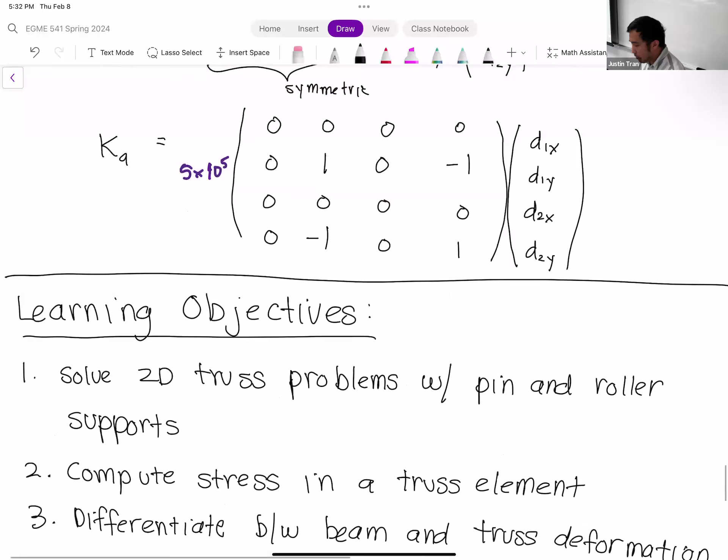Okay, all right, so let's go ahead and pick up where we left off on the example. I'm just going to scroll up here, this should be in your notes from Tuesday, so you don't have to rewrite any of this down. I'm just scrolling up to refresh your memory. So on Tuesday we were doing this example. It's a 3-element example. We have 2 truss bars and 1 spring, arranged in a 2D configuration, and what we're interested in is the deformations of node 1. Node 1 is the only node that's not fixed in this situation.

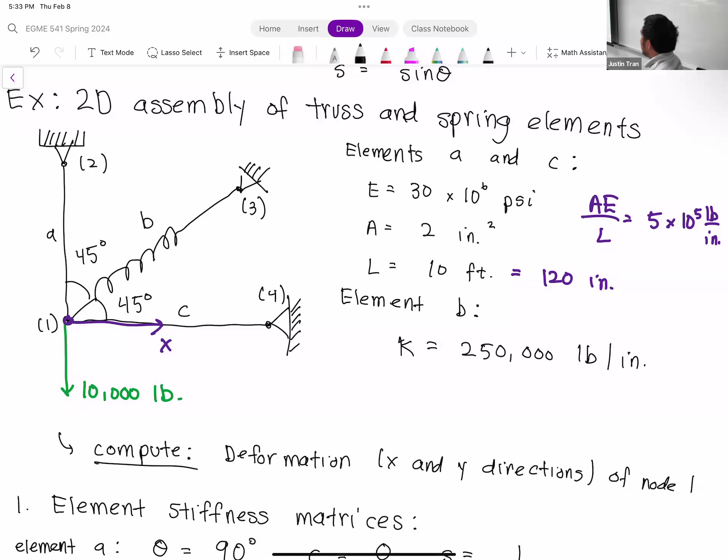So for the two truss bars, we are given its material properties as a Young's modulus of 30 times 10 to the 6 psi. Its cross-sectional area is 2 inch squared, and they have a length of 120 inches. And element B is a spring with a spring constant of 250,000 pounds per inch.

And so to solve this problem, we are going to go through our direct stiffness method, the same one that we've been doing for our 1D problems. The biggest difference here is that our element stiffness matrices are going to be a lot more complex, just because we're in 2D. So on Tuesday we went over this 2D element stiffness matrix, and we have a bunch of sines and cosines.

And we're going to write this out for all 3 of the elements. We did it here for element A, which is angled 90 degrees with respect to the horizontal. And we end up with this element stiffness matrix here. So we have 5 times 10 to the fifth out on the outside, and we have a bunch of zeros and ones because cosine of 90 degrees is 0. Okay, so let's go ahead and pick up right where we left off here.

So let's go ahead and compute the element stiffness matrix for element B.

Okay, so let me just draw the spring here, just so you can kind of see. So this is node 1, this is node 3.

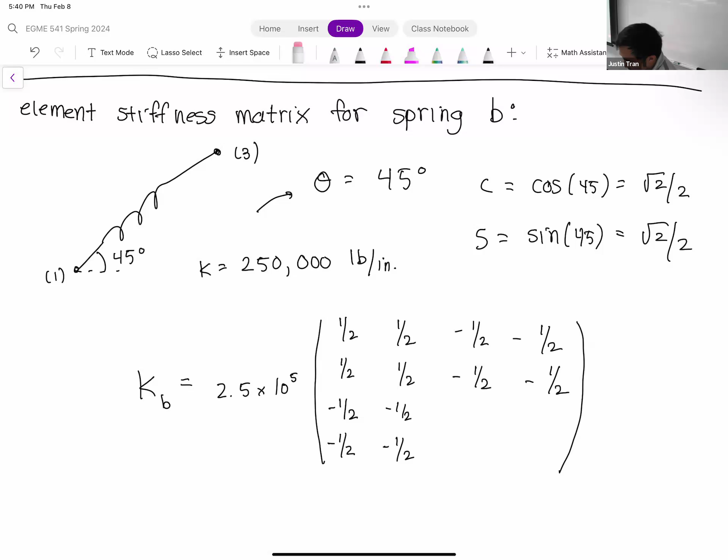As you get further down, it gets easier. This is going to be a cosine squared and a cosine times sine. Both cosine squared and cosine sine are going to be 1/2 in this case, because they're both just √2/2 times √2/2. We're going to have a positive 1/2, positive 1/2.

We're going to do our trick, and write that last entry into the third column. So it's going to be 1/2 down there.

And then our last entry here in the bottom right is going to be sine squared. We know sine squared is going to be √2/2 times √2/2, which is also just 1/2.

And then the last thing we're going to do before we move on to element C is we're going to write the degrees of freedom that this element stiffness matrix is responsible for. So we know from this figure here that element B is connected to nodes 1 and 3, so that means we're going to have D1x, D1y, D3x, and D3y.

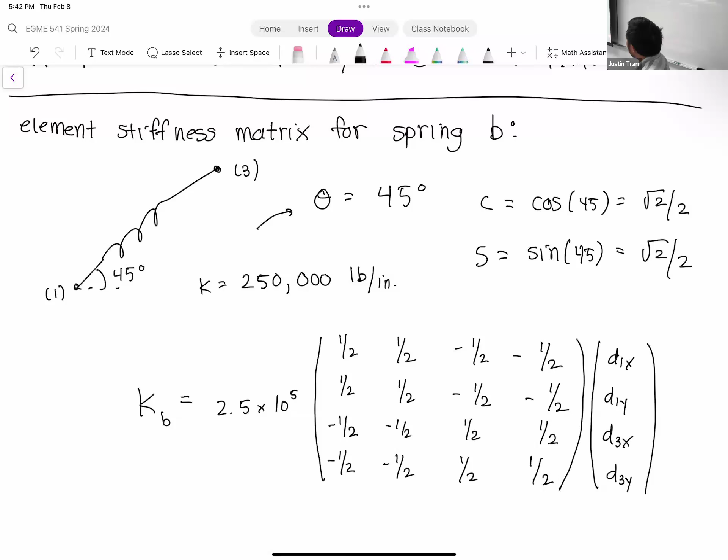Any questions on how we got that? Okay, all right, so let's keep going. So we have one more element here - we have element C.

So element C looks like this, connecting nodes 1 and 4. You can see here we have a perfectly horizontal element, and so since there's no angle here, our theta is just going to be 0 degrees.

All right, so if we compute our trig terms here, cosine of 0 is going to be 1, and sine of 0 is going to be 0.

All right, so let's go ahead and plug all these in. This one's a little bit easier just because we have some zeros. We know that any term that involves sine in our element stiffness matrix is just going to go to 0. We already computed the quantity AE over L from the previous class back on Tuesday - that was 5 times 10 to the 5th, so I'm just going to include that there.

So if we put these in, I'm just going to do this quickly since this one's much simpler. Our first row is going to be 1, 0, minus 1, 0. We write that into the first column, and we have something that looks like this - a matrix just like that.

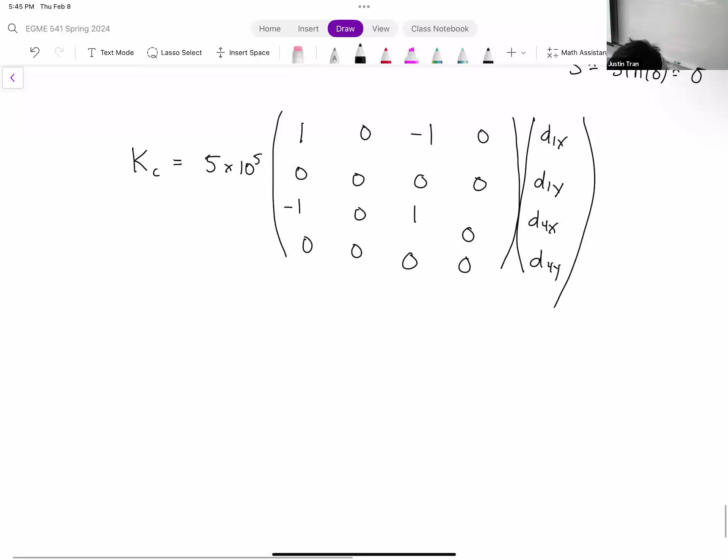All right, so for these problems, you may be interested in using a spreadsheet program or some kind of program online just to help keep track of the matrices, because this can get gnarly.

So in this particular problem, we have 4 nodes, labeled 1 through 4. But since we're in 2D, each node is going to have 2 degrees of freedom, because it's possible for each node to deform in the x direction and the y direction.

So what does this mean for our global system? If there's 4 nodes in the system and each node has 2 degrees of freedom, that means our global system is going to be an 8 by 8 matrix.

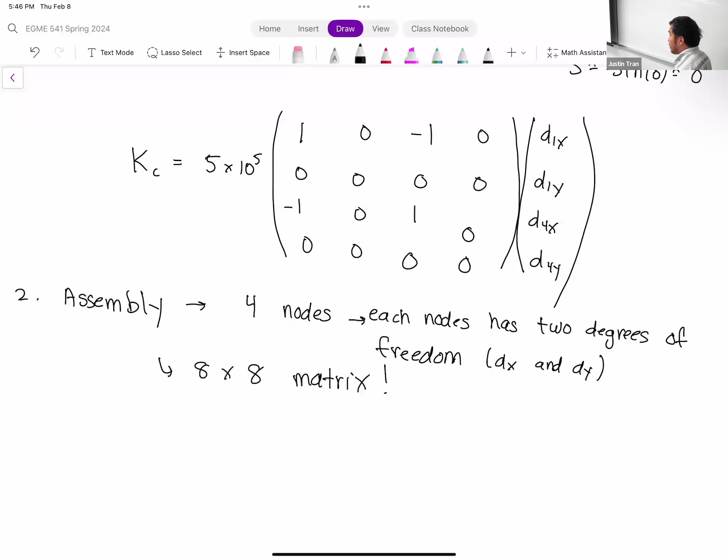This is going to be by far the biggest matrix we're going to write in this class, so it gets messy. I'm lucky because over the course of my lifetime, this is probably the 11th time I've done this problem in front of people, so I know what the solution is. But if you're doing this for the first time, it's very easy to get lost.

All right, let's start with the forcing vector. The way this works is you go node by node, starting from node 1 to node 4, and list its x and y components. We have f1x, f1y, f2x, f2y, f3x, f3y, f4x, f4y. That's 8 rows.

Our matrix similarly is going to have 8 rows and 8 columns. Oh, I forgot one thing — we're going to do that thing where we make things simpler: let's have a factor of 10 to the 5th out in front, just to save ourselves a little writing. So it's implied that everything inside the matrix is multiplied by 10 to the 5th.

Let me go ahead and write the columns in here. I think for this problem it's especially useful just because there's so much going on. So we have D1X, D1Y, D2X, D2Y, D3X, D3Y, D4X, D4Y. Now we're going to write the rows in: D1X, D1Y, D2X, D2Y.

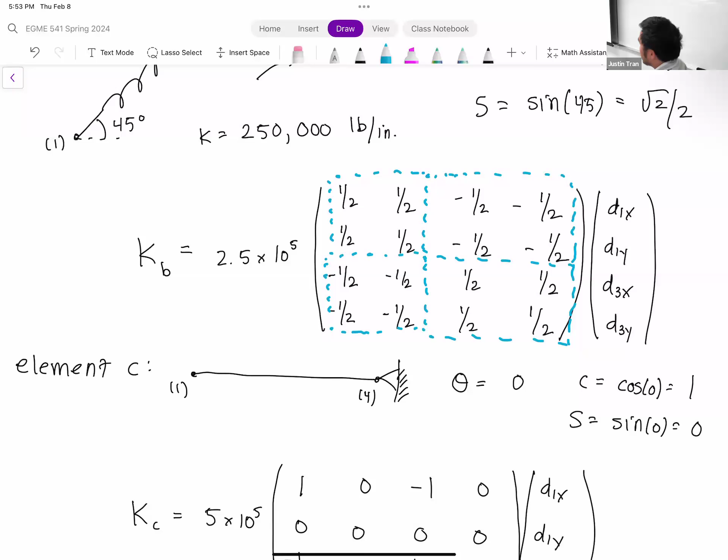So I've basically taken those four quadrants and split it up into the different parts based on the node number. Let's go ahead and insert these. Remember, for any overlapping components, we're just going to add them together, so we're going to add a plus.

The numbers for this are a little unfortunate because in front here we have a 2.5 times 10 to the fifth, and we take half of that, we get 1.25. So we have plus 1.25, plus 1.25, plus 1.25, and this 5 plus 1.25. For all of those overlaps, we're going to add a positive 1.25 to them.

Now we're going to go to the upper right, and that blue portion is going to be all negative: minus 1.25, minus 1.25, minus 1.25, and minus 1.25. Then we come to the bottom left, which is also minus 1.25, minus 1.25, minus 1.25, minus 1.25. And then the bottom right, which is positive 1.25, 1.25, 1.25, 1.25.

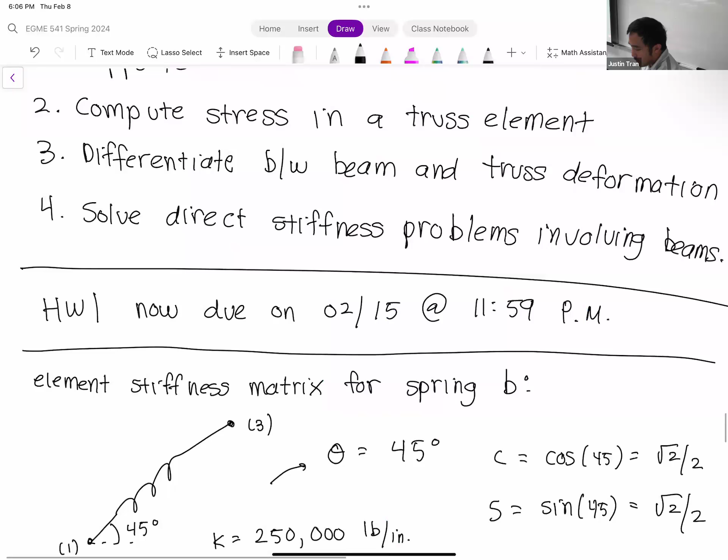So it's just going to go to the right and down? Yes, exactly. Which is interesting because our force is only in the y direction here, right? But we do see a little bit of drift over to the right, mostly because of the spring. When the spring pulls down, it has to lengthen in that direction, so it pushes it over to the right.

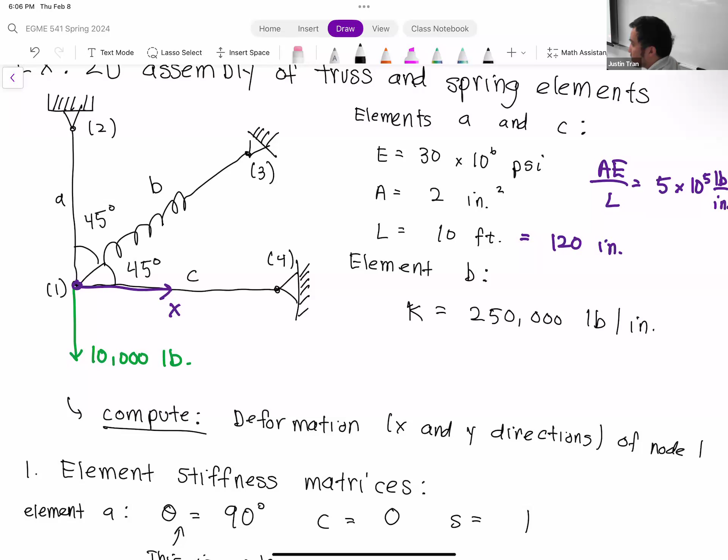Okay, so let's move on to the next thing, which is actually kind of an addendum to this example. One thing you can do for truss elements is compute the stress in the truss elements. When I talk about stress, I mean the internal structural stress within the element.

The reason I'm bringing this up is that when we do ANSYS in a couple weeks, one thing you're going to learn is that a lot of people use ANSYS to do stress analysis. FEA.

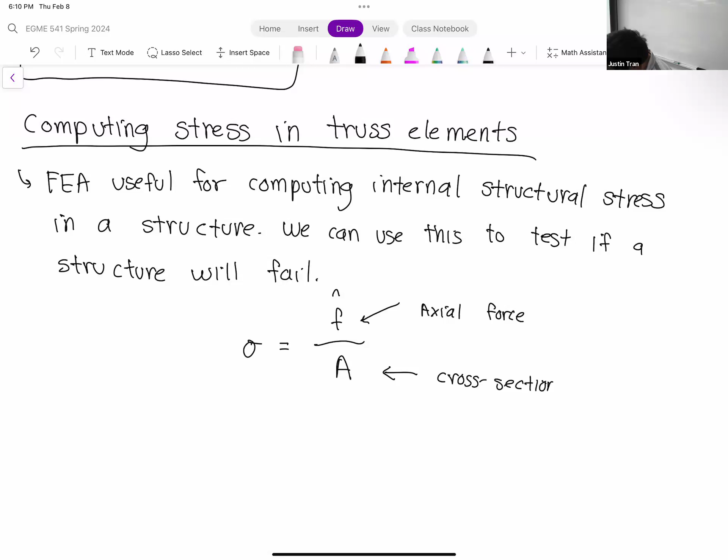The good news is that after you complete a direct stiffness problem, let's say you just did the previous problem there, you have access to all these pieces of information, although we do have to work on it a little bit.

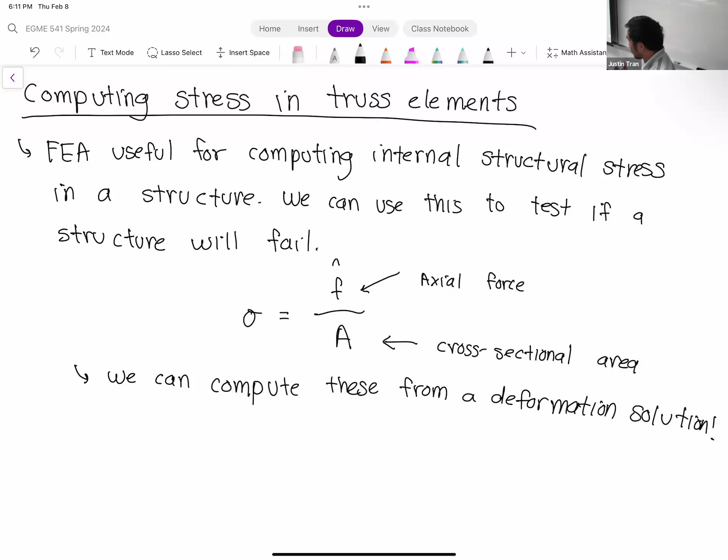It does involve some transformation matrices, and in the interest of time, I'm going to skip the derivation for it, but the solution looks something like this.

So if you want to compute the stress in a particular truss element, you take the Young's modulus divided by the length, and multiply that by a row vector. This row vector is going to be minus cosine, minus sine, cosine, and sine. So you can see here we have our sine and cosine terms. These are element specific.

And then you're going to multiply that by a column vector of that element's deformation.

This does require you to pick out different entries of the solution for that particular element. I'm going to show you how to do it for both of the truss elements in the previous examples, just so you can see how this is done.

So let's take our result from the previous example and let's compute the stress.

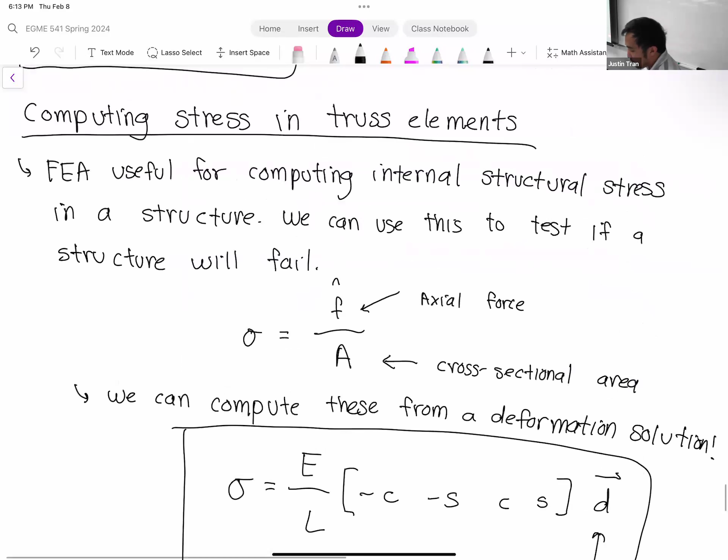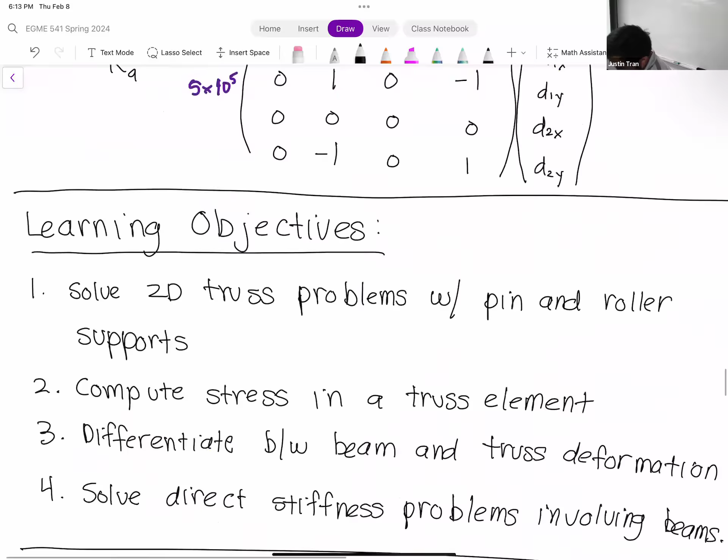Let's start with element A. Element A is the first truss bar that we have, it's the vertical one. If we come back up to this figure here, we see element A is connected to nodes 1 and 2. It's the one that goes up and down.

We also know the angle here. The angle is 90 degrees. That means cosine is going to be 0 and sine is going to be 1.

So the stress in element A is going to be the Young's modulus divided by the length, multiplied by this row vector. We have minus cosine, minus cosine is going to be 0. Then we have minus sine, minus 1, 0, 1.

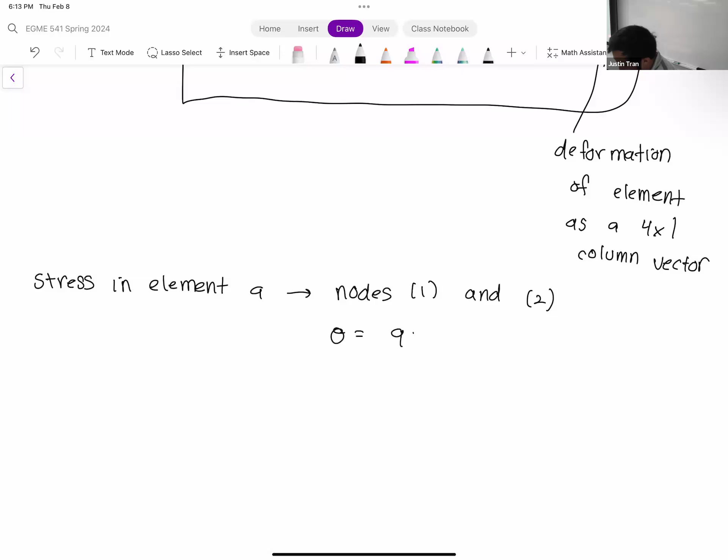Then we're going to multiply this by the deformation vector for that particular element. This is going to be a 4 by 1, so it's going to be d1x, d1y, d2x, d2y. Some of these can be 0, that's okay, and in fact in all likelihood some of these are going to be 0 because of the fixed constraints. So let's go ahead and plug in for these.

So we have 0.0033 inches for d1x, d1y is minus 0.0167 inches, and then d2x and d2y are both 0.

So then we do the vector multiplication. We have a row vector multiplied by a column vector, so that's just basically the dot product between those two vectors. We plug in for E, we plug in for L, and what we get is 4,175 PSI.

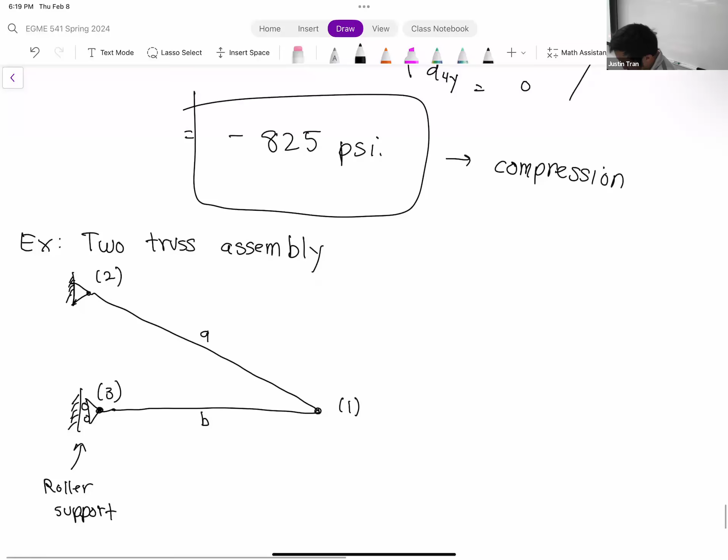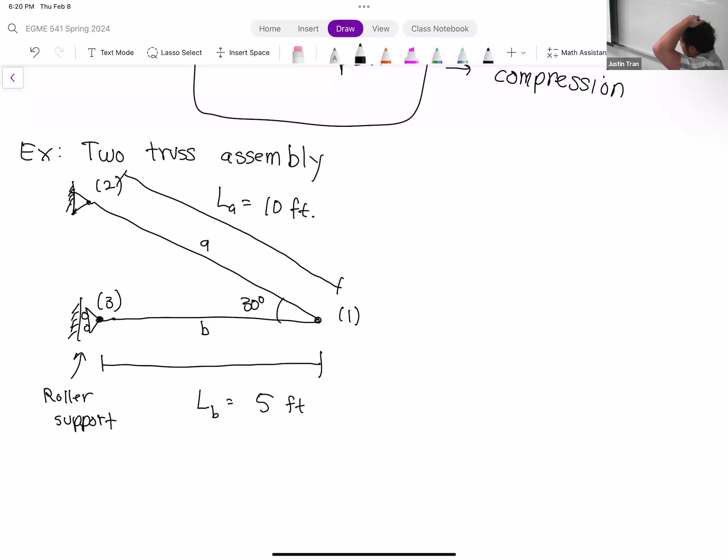The angle between the two elements we're going to assume is 30 degrees. The length of element B is 5 feet, and the length of element A we're going to assume is 10 feet. Besides that, we're going to assume both truss bars are made of the same material, so they have the same Young's modulus, and we'll assume they have the same cross-sectional area as well. So E is equal to 30 times 10 to the 6th psi.

Question: how would a hinge support differ from a fixed support in our calculation? Since these are truss elements, we've mostly been dealing with hinge or pin supports. Effectively they're the same as a fixed support, because truss bars don't impede rotation at all. But once we get to beams, there is a difference between pinned and fixed supports. If you mean the roller support, that will make a difference in terms of how we constrain the different degrees of freedom, but I'll leave that until we get to the boundary condition portion. If you want a quick answer, we're going to constrain one direction but leave the other one free.

Our cross-sectional area is going to be 1 inch squared. Just like we did in the previous example, let's use our direct stiffness method.

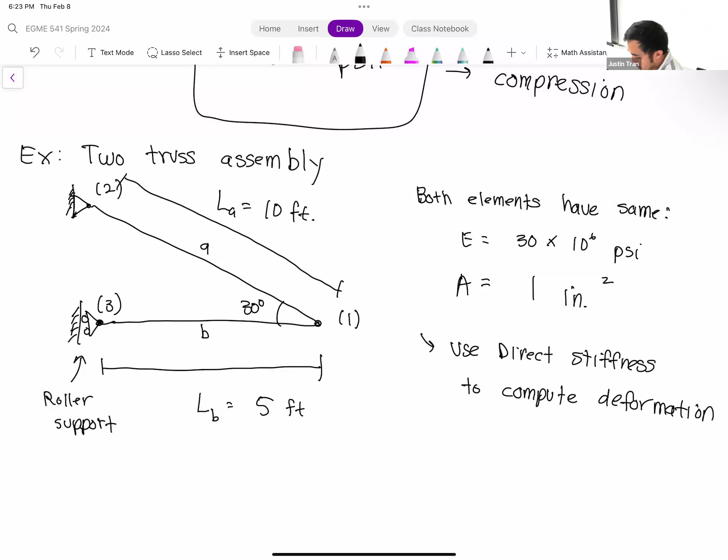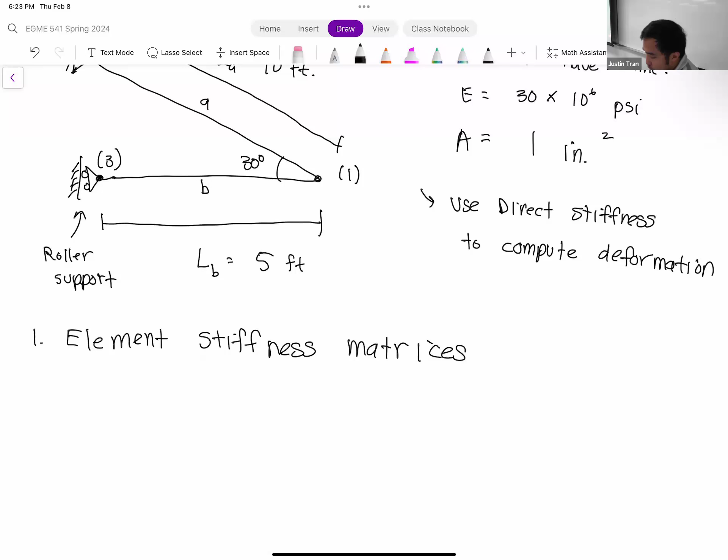Okay, so let's start with the same method as we did before. Let's start with our element stiffness matrix. We only have to do 2 here, which is nice. So let's start with element A.

Let me draw it here just for the sake of it—I know I have it right up there, but let's draw this one here. Okay, so from the figure we know that element A is connected to nodes 1 and 2 in the configuration shown. We're also given this angle right here, which is 30 degrees.

So we now need to compute the element stiffness matrix for this element. Okay, so the first question we're going to answer is what is the angle theta for this element? It's very tempting here to put 30 degrees, right, because that's the angle given to us in the figure.

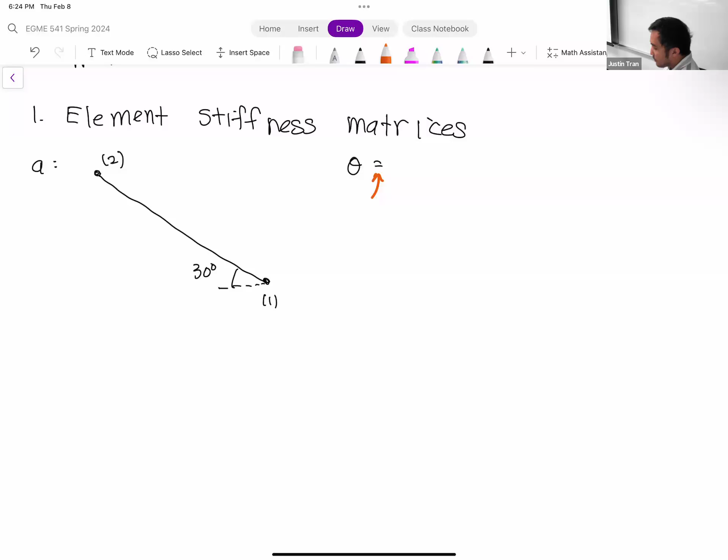But I'm going to tell you to hold your horses a little bit, because remember what this angle is defined as: the angle between our element and the positive x-axis. So where is the positive x-axis in this situation?

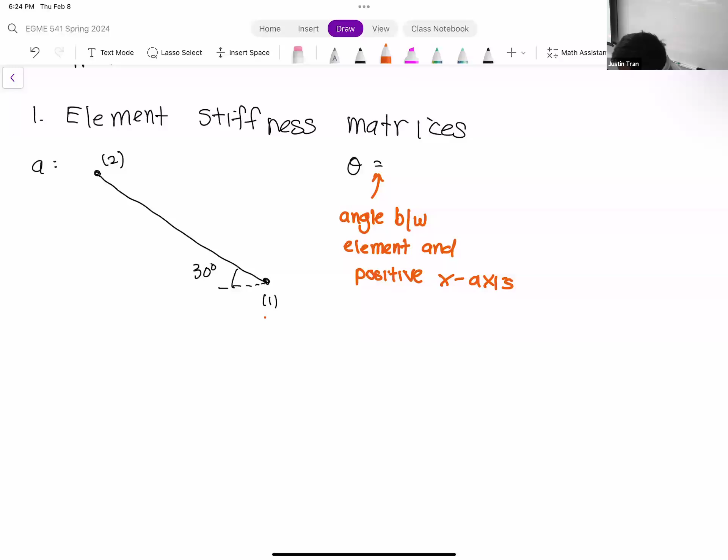Well, there is not one, but we have to draw one in. And so what you have to do in these situations is go to the lower numbered node, which in this case is node 1. So node 1 is the lower numbered node in this case, and then from there you're going to draw the positive x-axis.

All right, so now what we want is the angle between this element and that positive x-axis. The angle that we actually want is this kind of larger angle like this. We do a little bit of geometry here, and we can see that this angle here is actually 150 degrees, not 30 degrees.

So why do we use this convention? Why do we use the lower numbered node? Why do we use the positive x-axis? In honesty, there's not a great reason for it—it's just a convention. So in order to make sure that when you do these problems you're consistent and everything lines up correctly, we have to have a convention, and this is just the one that I use.

You can very easily choose a different convention—if you want to use the higher numbered node, or the y-axis, you can do all that. As long as you're consistent in your convention, you're going to end up with the same answer. But if you want to follow the same method, this is the one I use: positive x-axis on the lower numbered node, rotating counterclockwise from there.

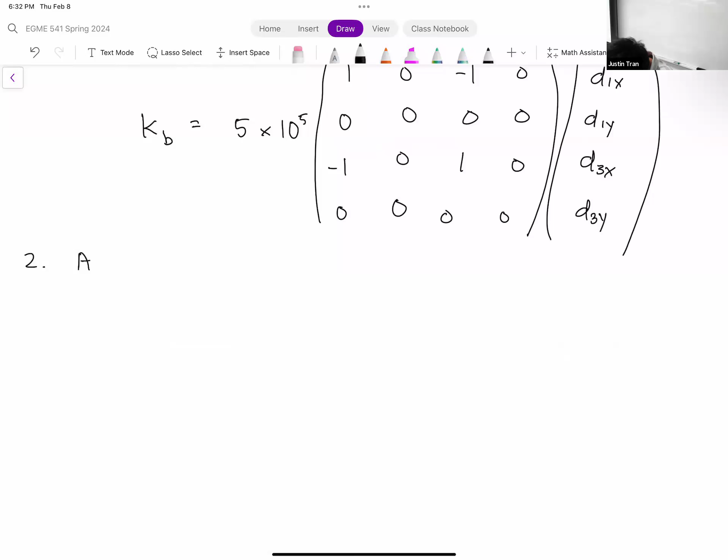All right, so the next step is going to be assembly. Let's go ahead and do that. We have a little bit of a more reasonable system here because we only have 3 nodes, and so that means our stiffness matrix is going to be a 6 by 6.

Question: I know it would be unconventional, but could we have chosen our positive x-axis to be in the opposite direction? It would yield different matrices, but as long as you're consistent with it, all of those things are going to cancel out in the end. So as long as you're consistent, you can choose whatever convention you want. You very easily could have chosen the positive x-axis to go the other way. As long as you're consistent and calculate the angles the same way, you're going to get the same result. The sign at the end might be different—you might get a negative x deformation, but that's because you defined the positive x direction to be going to the left. As long as you're consistent and apply it all throughout, you can do all that.

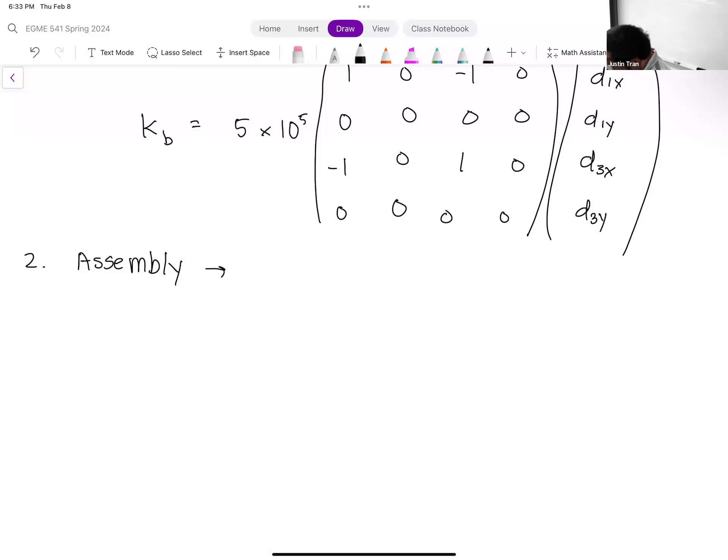All right, so assembly, 6 by 6 matrix. We have F1x, F1y. Thanks.

Okay, let's go ahead and insert our matrix here.

What's the best way to do this? The one that's really a pain to do is going to be element A, just because we have all these root threes and stuff going on. Whenever you have an irrational number, that's never fun to input into a matrix.

Okay, let's do this. First thing we know, since we have an extra factor of 10 to the fifth, I'm going to leave that outside there.

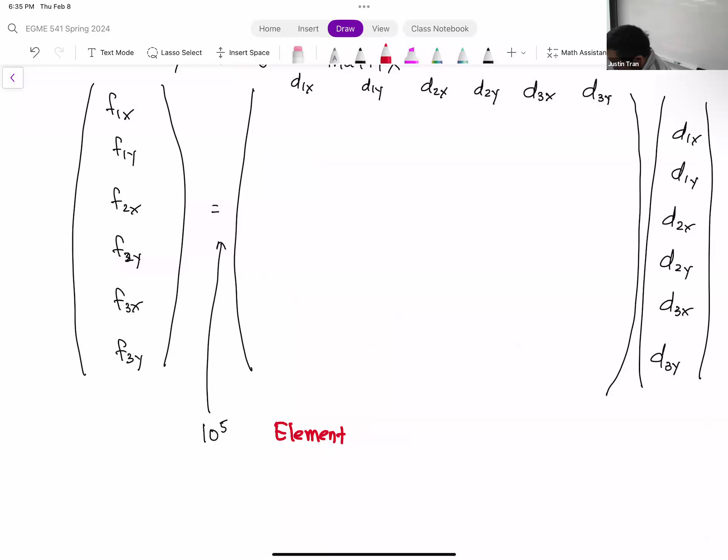Let's highlight the locations where they're going to be. I'm kind of rushing a little bit just because I do want to get to the end of this example before class ends today. Okay, so we know element A is connected to nodes 1 and 2, and it's going to take up this portion right here.

Element B is going to be nodes 1 and 3. So if we box that out, it's going to be here, here, here, and here.

All right, so I'm just going to fill this in. Of course, this requires you to do each one individually and then add them up, but let's do this just for the sake of time.

So in this top right here, we have a 6.875, multiplied by 10 to the fifth on the outside. Then we have a minus 1.08, minus 1.08. That is something I rounded because it involves root 3 over 4, which is an irrational number.

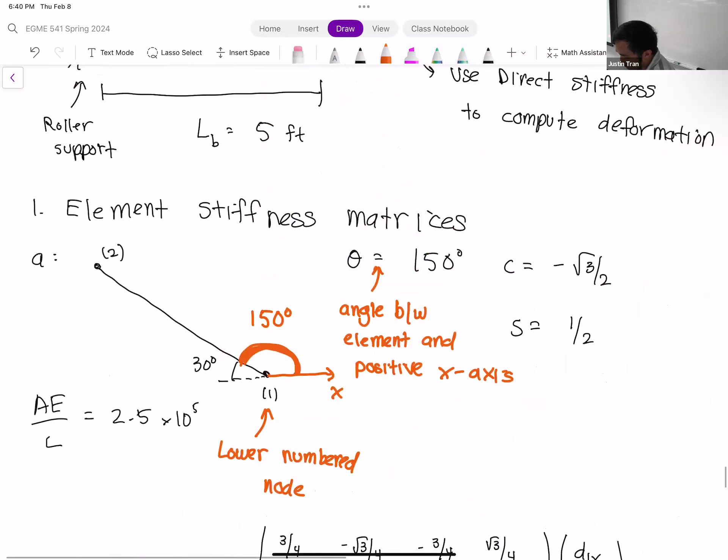So now let's go to node 3. Node 3 was the interesting one we were looking at the beginning of this example, right? Node 3 is constrained by a roller support. Let me scroll back up here so you can look at the figure one more time, and let me circle node 3. So node 3 is on a roller, right?

And what a roller does is it only constrains the direction that is perpendicular to the wall. In this case, our roller wall is vertical, so that means the only thing we're going to constrain here is the x direction.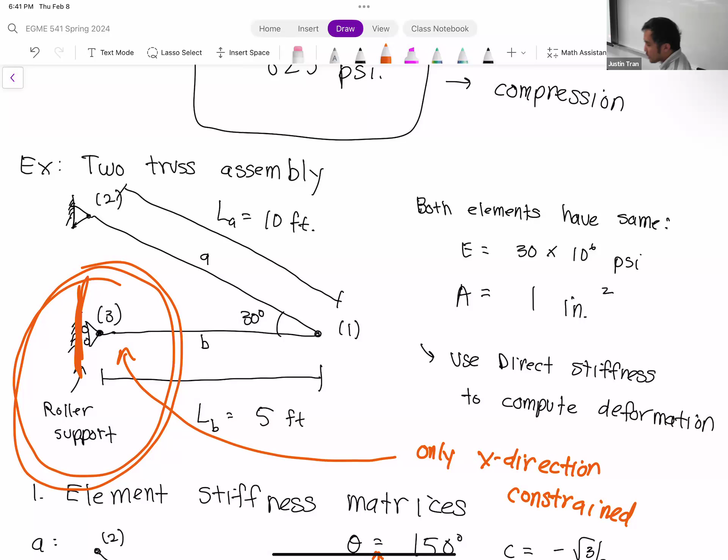Okay. The y direction, we're actually going to leave it free. And so what that means is when we come down here to the matrix, let's write roller support.

That means that only the x direction is going to be constrained in this case. So when we do our usual zeroing out, we're only going to constrain this row. We're going to leave the other row alone.

So when you have a roller support, you only constrain that one direction. Whereas normally, for a regular fixed support, you constrain both, but for a roller, you only do the one direction. Any questions on that?

Okay, so theoretically, if we did put the load in, the load goes right here. So the load is minus 25,000 pounds. And this is a 0.

So theoretically, we're at a point now where we can solve, right? Well, technically, no. So I want you guys to look at the last row and the last column of this matrix.

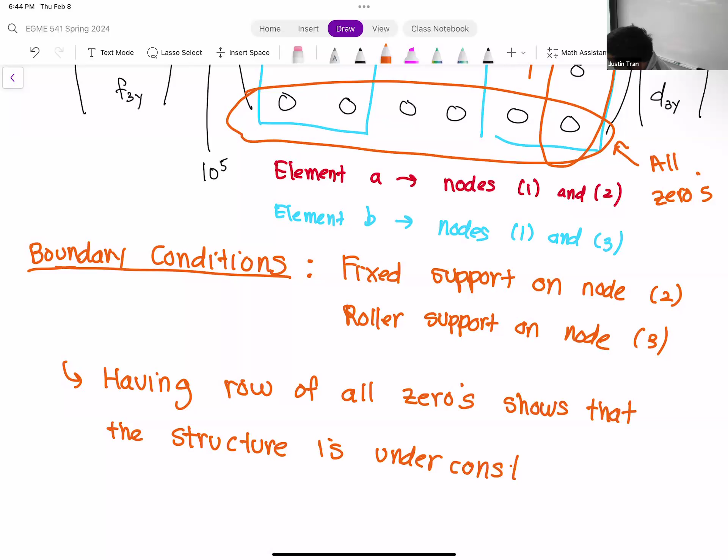And so if you try to actually put this structure into practice with the forces in this configuration, it won't be able to hold that configuration. It will actually try to find a new equilibrium that's actually stable.

And this is a very common problem in ANSYS as well. So in ANSYS, if you've been in 410 before, probably one error you're familiar with is called the solver pivot warning. This is basically telling you that you need to add more constraints to your structure.

So the way we're going to do that here is we're actually going to change the problem. We're going to change that roller support to a fixed support to properly constrain it. And once we do that, then we can actually solve.

But it's important to recognize in situations like this, when you have an under constrained system, that tells you you need to go back and change your problem statement a little bit. Any final questions on this before we wrap it up for the week?

Okay, so when we come back on Tuesday, I do want to revisit this. This is a really important point. And then once we do that, we'll move on to beams, which is our next element.